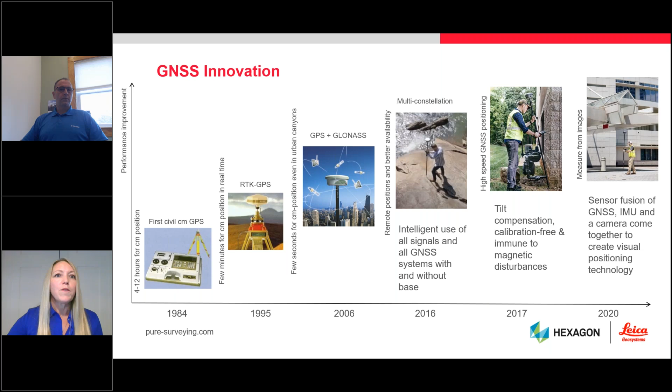But as with any technology, the speed of innovation doesn't necessarily equal the level of adoption. Surveyors who are comfortable with proven technologies don't always rush to implement the latest advances. And with the almost warp speed of technology innovation within the last several years, even surveyors who do make regular investments to stay on the leading edge don't always fully understand the power and potential of the systems they use. To further complicate the situation, manufacturers use their own terminology to define new capabilities. For professionals who want to optimize their GNSS systems to maximize the safety, efficiency, and results of their surveys, understanding the capabilities is not always straightforward.

In today's session, we're going to walk through some of the most meaningful developments in GNSS over the last several years, explain some of the terms, and help you become more knowledgeable about how you can fully leverage these functionalities to optimize your field work. For those in the audience who already use Leica Geosystems technology, please note this is not a training session. We do have training courses available that will give you a deep dive on the specific features, functions, and applications of your hardware and software. If that's something you're interested in, I encourage you to reach out to your local representative for more details. What we will do today is give you an overview of key capabilities so that you can be more informed as you use your current technology and as you look to make future investments.

So with that, we'll go ahead and get started. And I think the first term that we want to talk about here that you'll see often in relation to the Leica GNSS technology is Smart Check. So Bob, can you help us understand what SmartCheck is?

Yes, thank you, Christy. SmartCheck is built-in redundancy. Manufacturers many times have to create terms to help define technologies or processes inside of their hardware, and Smart Check is one of those. Now, this is not new to Leica, but it's just as relevant today as when it came out probably close to 15 years ago. What it allows us to do is when a receiver is in a high multipath environment and it has an initialization — and those that are used to using GPS are familiar with what that is — but it's when you have a fixed ambiguity of your sensor and your correction to get a position.

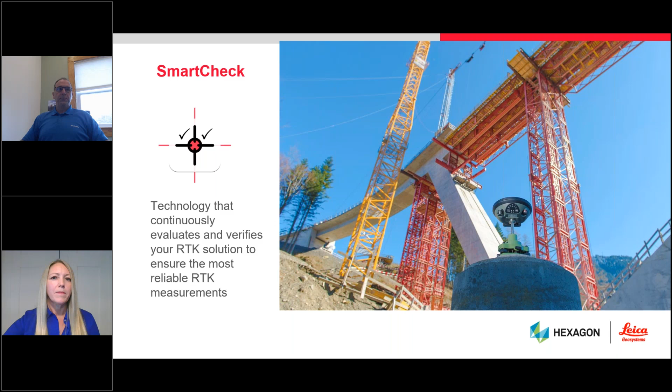So you can simply wait the 5 or 6 or 7 seconds to get a new check that shows your current initialization just got verified with a new one that was computed, and that you're good to go. So we're really talking about reliability. It's absolutely that reliability, the redundancy, and building confidence in the solution you're getting from your hardware.

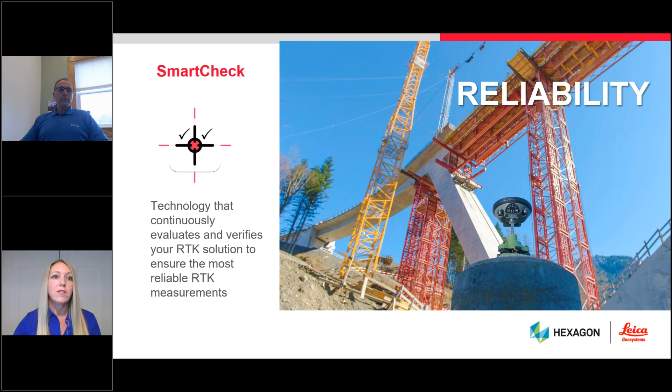Something else you'll often see when we're talking about Leica GNSS technology is SmartNet. Tell us what SmartNet is all about. SmartNet is our network correction for RTK service.

So we have base and rover that many people are familiar with. A lot of people are also familiar with networks, whether a state solution or other competitors that have networks as well, some built strictly to service the agriculture industry. SmartNet is the Hexagon Leica branded network for the world, but specifically we're talking about North America here.

We have 1,500 stations in 50 states, so not every state is completely covered, but we are present in every state and 8 provinces in Canada. This is not exclusive to Leica receivers, so it can be used by other brands, other makes and models of receivers. The big thing you want to know and check always is the quality of your network.

There are many other networks that are very well built and maintained, and then there are other ones that, while they may be good networks for their design purpose, like agriculture, they don't meet the demands and accuracies required by a surveyor. So that's something you always want to be aware of.

Having SmartNet is really about having productivity. It's about being able to go out, and as long as you have a connection to a network and you're inside the large area covered by SmartNet, you can just start your receiver and go to work. You can let us worry about modernization of the base stations these corrections are derived from. So it's just about being more productive, covering this large area without changing and worrying about getting new logins for other networks in different areas.

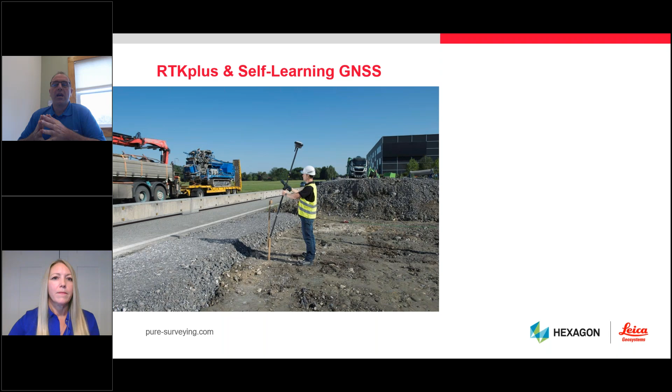With those previous advances we were talking about with SmartNet, with the ability to use SmartLink, with the number of satellites that have been launched and the number of signals on each satellite multiplying rapidly, having a receiver that can make decisions basically second by second on the best RTK or satellite geometry, or which satellites to use, is very important. Along with, say, you step over a hill and lose your cellular connection, being able to transition seamlessly into using the SmartLink service, or SmartLink fill service, to bridge the gap and go measure.

Maybe it's just a couple of iron pipes, maybe it's just a fence on the back of a property line. It would take a lot of time and effort to go measure another way. I'd either have to set up a different base station or back up to some place where I could set some control to set up a robotic total station to make these measurements.

Now I can bridge the gap. It's another technology enhancer that allows us to bridge gaps when RTK position or accuracy is acceptable for the measurements we're making. We don't have to pull a different tool out of our toolbox to go get those measurements. So we're really talking about efficiency here more than anything, and it's not manual. You don't have to go in and turn off specific satellites or make these decisions. It's really about the processor speed built into these sensors that allows them to do it for you.

Okay, well what about the other things we've been talking about so far? Is there anything the professional in the field needs to do to take advantage of these capabilities? Like we said, many of these, SmartNet, SmartLink, are subscription services. So those are things you'd need to talk to a local sales rep about acquiring, or maybe do some research online. Obviously a lot of this is on Google, but you can contact your sales rep. And then some of it is about your receiver and understanding the value that may be gained.

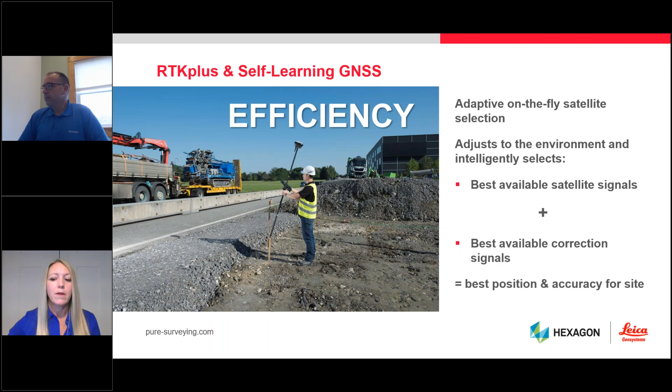All right, so all of those things are really significant advances on their own that we've seen over probably the last 5 years. Now we're also seeing an acceleration of GNSS technology, both in terms of what's happening in the global satellite constellation and how sensors are able to make use of this information and add a greater level of intelligence to the results. Can you talk us through what this means for surveyors in their day-to-day work? And I am going to go ahead and let you take over on the screen here in just a moment so we can more easily share the next few slides.

Absolutely, it's about expanding the boundaries and taking advantage of the signals and the corrections provided by the satellites. These are modernization efforts that have come about through the US with GPS and other countries, be it Russia with the GLONASS satellites or the European Union with the Galileo satellites, and the enhancements available through those services and technologies that have been launched and put into space as part of the space component.

And 2 support the new L1C, which, side note, don't confuse that with the original L1 C/A code, which was the original civilian signal off of the GPS signal. So this is going to make us more and more robust. It's the multi-frequency, it's the ability to work in more high multipath environments, specifically in canopy and stuff like that.

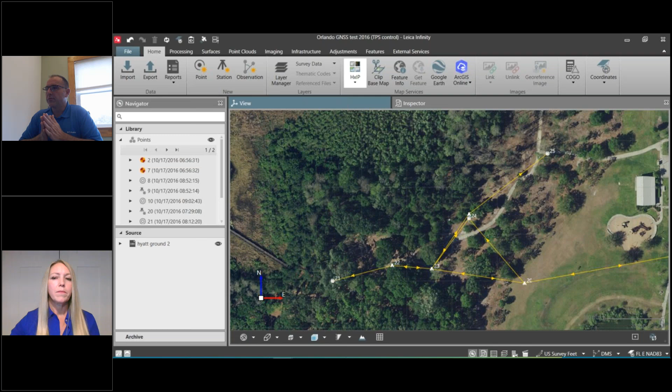The next slide will kind of run through a scenario that was done by Pierre Lebay. And this was just some testing that we actually have a little more metadata on to help quantify the value of the L5 component. So he went into this wooded environment.

This is a quick video just to give you some context of the size of the trees and the environment that he was measuring and working inside. And we were again comparing the GS14 to the GS16 just for our own knowledge and to gain some perception and value that we could help display to the customer.

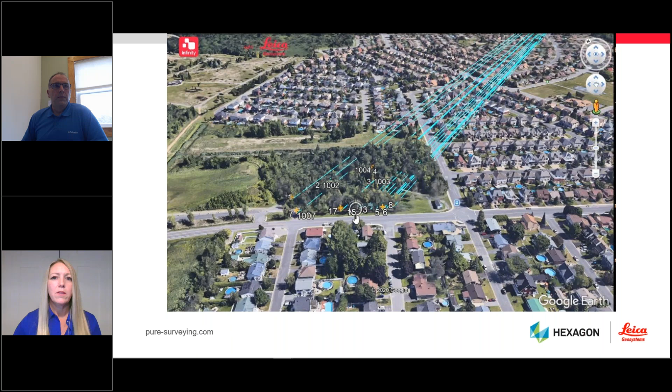Now, does this mean, Bob, that with the GS16 you can survey in the trees? It doesn't. It means you can push boundaries. So in this case, we were able to go further than we could ever go before, and we were able to work in these environments.

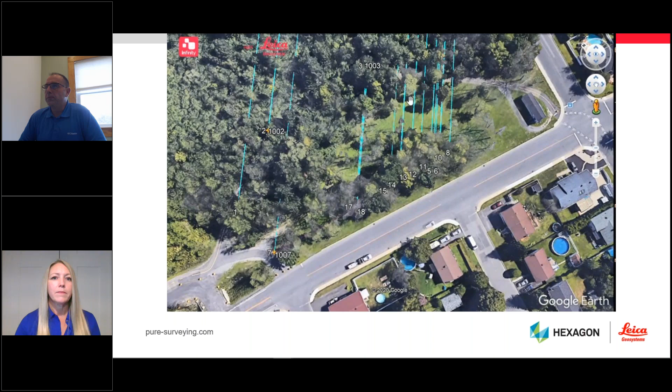Now, I don't know specifically what time of year it was - maybe there was a little more canopy off or on. There's nothing that says you'll always be able to work in every tree environment. Your length of baseline, whether you're using base and rover, your network - very important component to this is your network or the base that you're using. Does it support full GNSS?

Because many people do run mostly network rovers, for instance - they go out to an environment that doesn't have a network, so then they set up their own base, and they may be using a legacy receiver they have. Well, as soon as you use that legacy receiver that doesn't support all the signals that your rover does, the ones your rover is tracking become irrelevant. The two need to only use common sources. So if a satellite is not seen by one or the other, it can't be used. So if you take anything away from the base, you also have to end up taking that away from the rover.

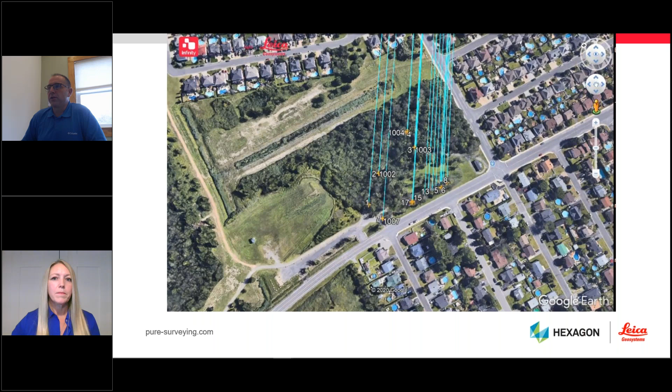So while we're pushing boundaries, one of the main tenets and rules that our developers live by is they try to make this line very, very narrow - which means that if you get initialization, your initialization is good, and you can either work or you can't work. The last thing we want to do is get bad initializations and bad measurements, right? So that's something manufacturers can play with - how loose and how restrictive they are when they allow those initializations, and we keep ours to a very, very tight line.

What we're showing on this slide is that same comparison. On the left were measurements taken with the GS14 and the initialization times. We had a max of 5 minutes to get initialized before we would move on to the next point.

You can see there, it took about 24 minutes to measure 6 of the 10 points. So only 60% of our target points were measured, and now we have to find another tool in our toolbox to go measure those.

It took us 24 minutes, as opposed to when we went to the same exact site, those same exact points with the GS16, we were able to get 90% of them in half the time. It took about 12 minutes to take 9 of the 10 measurements, and there's only 1 point that we couldn't get.

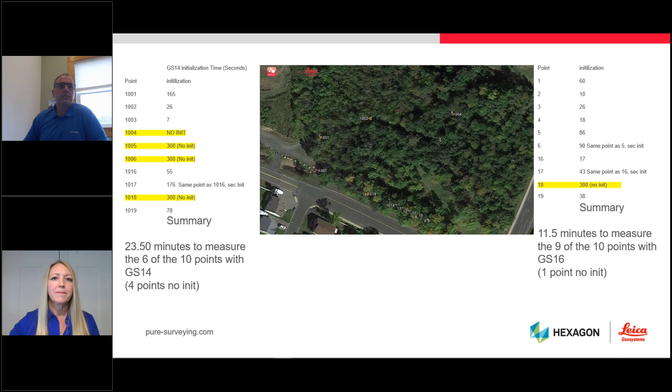So following on those same footsteps, a couple of years later, we launched the GS18T, which was a huge advancement for us and for everybody, because it gave us a way to measure tilt-compensated points without using a magnetic compass.

Magnetic compasses have been an issue, which is why William Austin Burt built the first solar compass for surveyors in 1835. So we recognize that magnetic disturbances in the environment were a problem, even to a regular magnetic compass, that long ago.

Well, take all the technological advancements we have — the buildings, the steel in buildings, the number of cars, underground electric, overground electric, different rates — all these things are disturbances to a magnetic compass.

So with the launch of the IMU-based correction for a tilt rover, we were able to have a calibration-free, magnetically immune tilt rover, and it was proven accurate and reliable — all things that surveyors absolutely need to trust in a tool and to put it into service in their fleets.

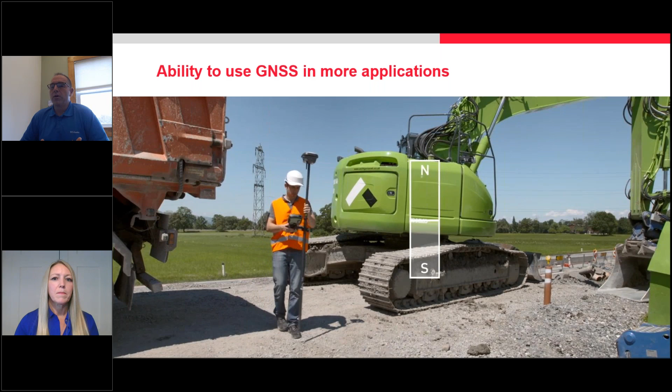This wasn't just about overcoming a limitation — it's about changing what we could measure and how we could measure it. Being able to check: did this truck just run over this hub? If anybody's been on a construction site, you're always wondering, did he back up and then move forward? Do I need to flag it? Do I need to dig it out and replace it? Did this backhoe just eliminate this hub? I just blue-topped all this and equipment moves in.

I can make those checks as I walk by, and as you can see, there are huge magnetic disturbances there with the gas motors and the firing and all that stuff.

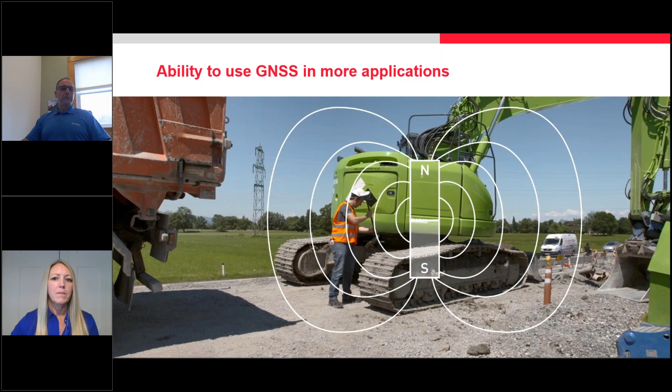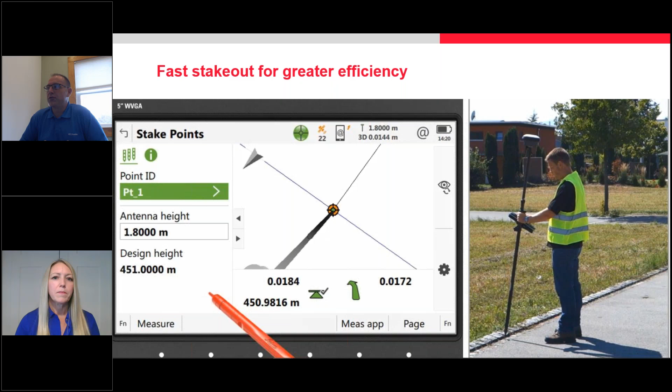So these are the types of things that we were able to overcome. One subtle challenge was forgetting about the bubble and the faster stakeout component. This was more of a challenge because of our legacy training, being so used to leveling that bubble before taking a measurement. Here, we already know our orientation and position. I don't have to stop, plumb the rod, move it, replumb, and adjust repeatedly. I can see it on my screen, my arrow goes green, I know I'm within my chosen tolerances, and I set the point.

It's probably 2 to 3 times faster staking a house or staking specific points using this tilt rover. So again, it was about efficiency to the end user, was the purpose of having this technology. It's not just a cool widget that made for good marketing. It was something that actually delivered value to the end user.

And if you have more work than you can get done, if your guys are working 70 or 80 hours a week, this is technology that can allow you to alleviate some of that stress on your workforce, allow you to take in more jobs and get them done faster, so you can increase your revenue and profitability.

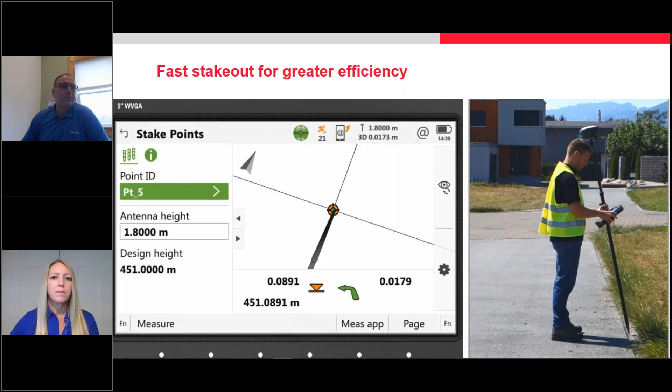Our latest release, and we'll get into some scenarios and working environments of this, is truly embracing visual positioning. So again, now that we have a tilt rover, what happens if I could capture in images points that I can't put this rover tip on, things I can't measure with GPS traditionally or up until this point, but GPS accuracy is acceptable technology.

So I don't need to do a closed traverse and measure these points using another tool for accuracy. I'm using it because the current sensor, the current technology I have, doesn't give me the ability to get the measurement I need.

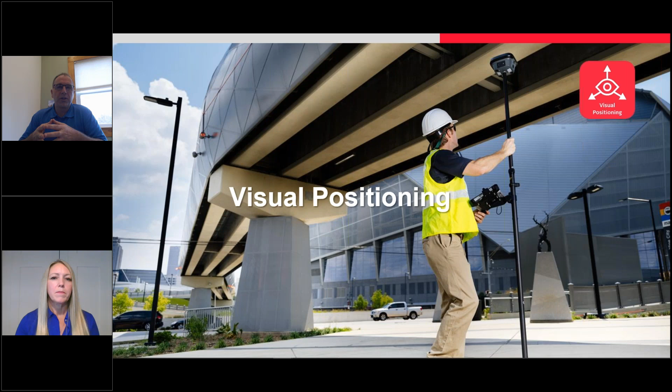And this is true sensor fusion. We've taken the GPS positioning we've already talked about, all the technologies that go into that. We include the IMU, so we can compensate for the pitch, heave, and roll of the receiver. Now we add a vision sensor or camera to that, and the processing power to fine tune the center of that, and be able to pick points and automate many times the picking of those points to calculate points inside the images. We'll go into that here in a second.

So again, we're looking at GNSS survey grade accuracy as acceptable. Here we're talking 2 to 4 centimeters two-dimensionally and 3 to 5 centimeters three-dimensionally. If we use the Smart Link correction service, we increase that by a couple centimeters on both sides.

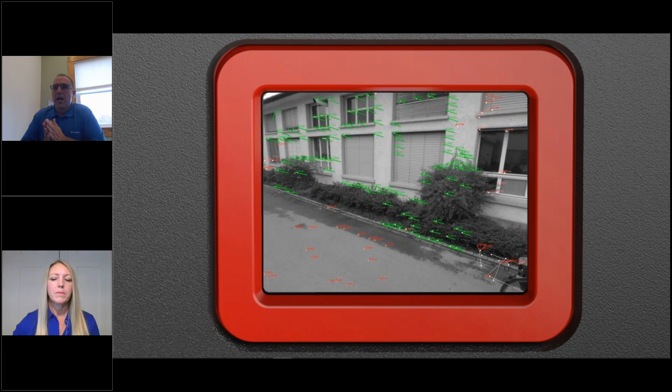What we're doing here, like I said, is true sensor fusion, and what does that look like to your receiver? This is a quick video of what that imaging sensor is doing. Anybody familiar with our RTC 360 knows we have the VIS technology, which helps position the sensor, positioning that laser scanner to within a couple of inches using an IMU and visual positioning.

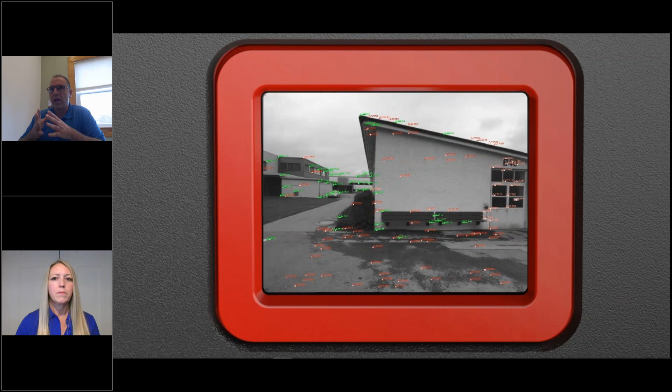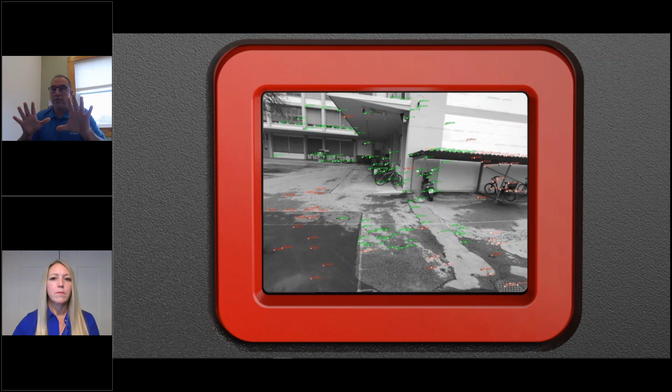What we're doing here is not positioning the sensor. We know very precisely where that center is because we have an RTK initialization and an initialized IMU on board. What we're doing here is finding objects, or finding specific pixels in the image. So when I select a specific object, it can automatically look through images in front of and behind, reconcile, and automatically pick that same object in those other images.

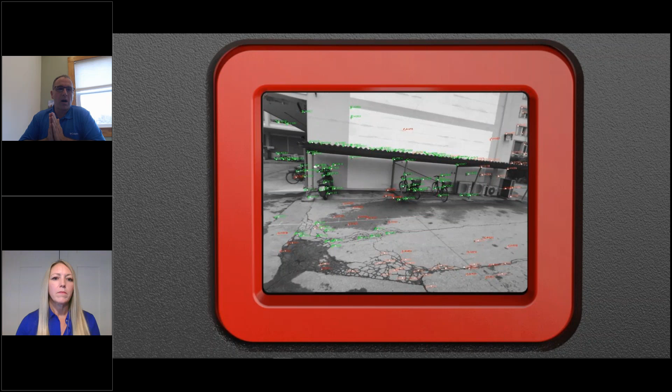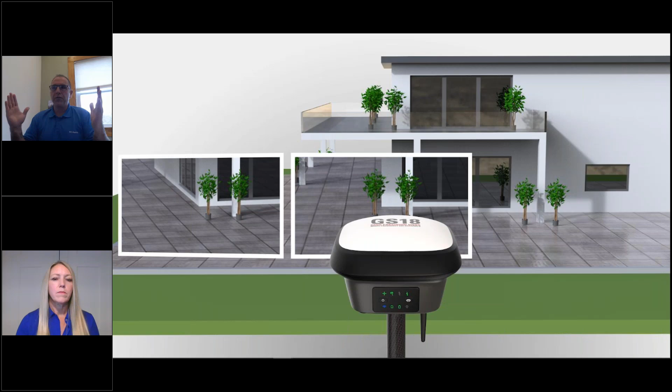I've got another example of what that will look like here. What we do, or our perception is, we have the GS18I, we have an object we want to capture, so we back up and walk around that object, in a line where that object is offset to the right or left. Then we go to the center of that image group and pick that same pixel, and the system will automatically look at the images in front of, behind, and pick that same pixel and compute the point at the intersection.

So this is very different than any technology that was out there previously using some type of visualization sensor, as those were static sensors put on control points and then had to be constrained, because we can solve for the full 6 degrees of freedom.

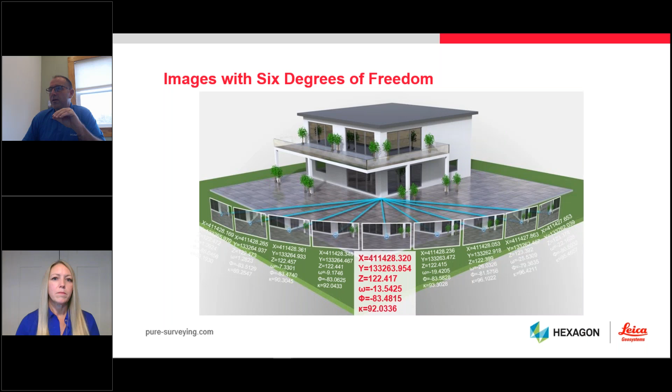So what that allows us to do is solve for the full 6 degrees of freedom in each image. We can position X, Y, and Z, but then we can also place the pitch, yaw, roll to each one of these sensors or images, so that we can compute the pixel and the intersection of all these and apply a code and the coordinate to that point. And this can all be done in the field.

There are a lot of components that can be done in office software, and we will definitely be touching on that in a future webinar. But what we're going to focus on here is what we can get out of Captivate and the GS18I in the field in these following scenarios.

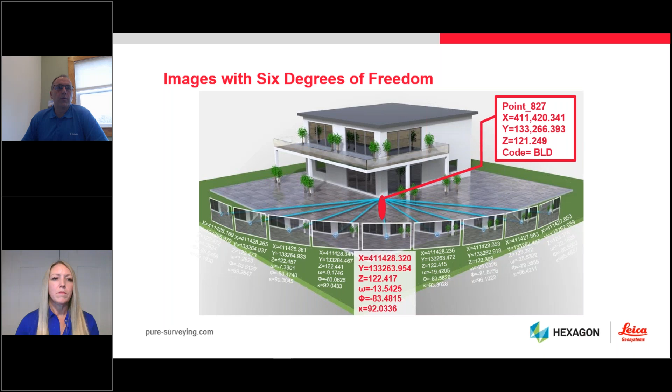We will show you a teaser at the end that kind of samples what we could get by incorporating the Infinity software as well. So what we're looking at here is there's a redesign of a roadway, whether they're just going to overlay it or they're going to completely enhance this area and maybe the intersection next to it.

This is something a lot of surveyors are very familiar with. We get a boundaries or a limits of our topo, and we can instantly go to the aerial photography here and identify 3 areas that are going to be challenging for GPS. 2 of those are challenging just because they're controlled environments, so they're gated off areas that we can't readily gain access to. And the other one is heavy canopy here that maybe we can't get the measurements from.

Maybe these are big oak trees, maybe they're historic trees, and they're going to design around them, you know, shift the road, do whatever they need to do to make sure they preserve these large oak trees.

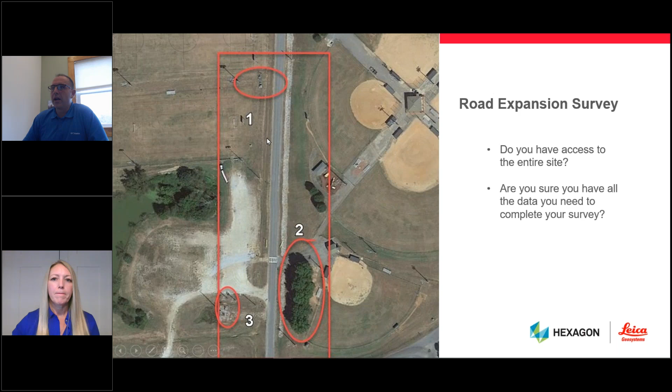So we'll cover each one of these challenging areas with the GS18I. I think the rest of it is pretty self-explanatory, how you would use RTK to measure the roadway, the crosswalks, and these other features here.

So the first one is inside this electrical. You can see we have a bunch of meter boxes inside of this fenced-in area. This is an area where we could go in, if we got access to it, with a GS18T and measure it.

If you had a robot, you could set up on the outside and maybe get reflectorless measurements through the fence. You'd have to do some fine tuning there to make sure you didn't pick up the fence, but you could probably gain that, but you're going to be less efficient.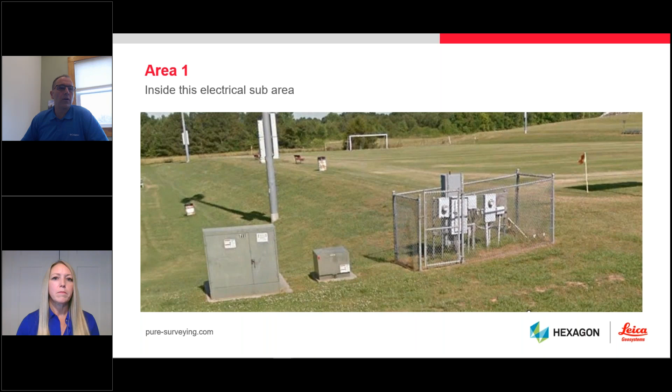You have to set control, you have to get different tools out, do station setup, backsight, you have to have something to check into. All these things take time in the field and slow you down. Maybe this is a long way away and that time will cause you to be there redundant days as opposed to being able to collect all this in a single site visit. All those things cost money to accomplish.

So what we've done here is we've captured an image group like we showed in the previous animation. We walked past the electrical area here outside the fence. And now we're going to go in and create points at these electrical chutes where they come out of the ground. So we simply go in, store it, calculate, give it a code, and take the measurement.

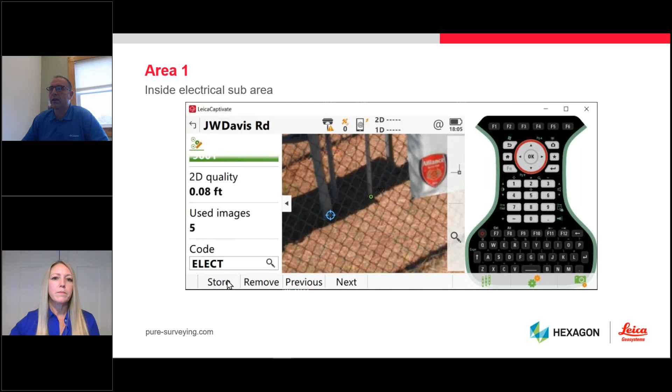Now that one happened to process everything automatically. Again, this one did too. It went to 5 images. We had 8 hundredths of a QC value. So we're happy with that.

On these next couple, we'll go in and we're going to pick as well. You can see that this is highly shadowed, so it's very dark, but we're able to see what we need out of the image and we can start taking the measurement.

In this case, the system wasn't able, probably because of the increased shadowing there, to automatically pick. So we need to go and manually add some more vectors from different images. That's all we do: at the bottom, we can scroll through our image group by going previous or next. We can get to those, zoom in on those images, and then we pick exactly where we want to create that point.

And then you can see that we have a 2D quality of our intersection computed on the screen for us. And we can do this to as many images as we have until we get through the QC value that we are happy with.

So there we had 4 points. Now we will pick one more of these, I believe. So I'm backing up to get to the center of my image group for the next electric feed that I want to grab.

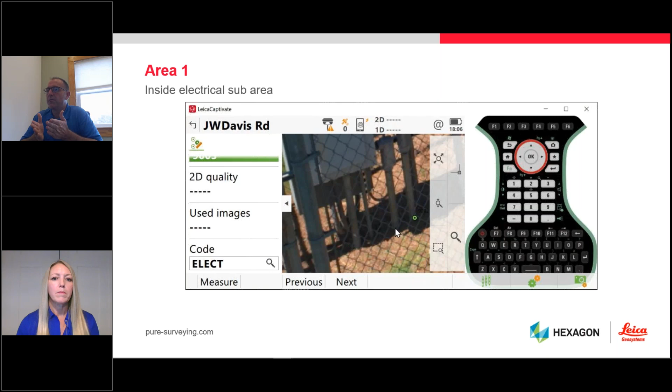So this will collect an image when you're walking or creating an image group at about one image every half a second. So there is a distance - you do want to be within 2 to 30 feet of the object you're trying to capture, and you want to digitize points inside of, like we are right here.

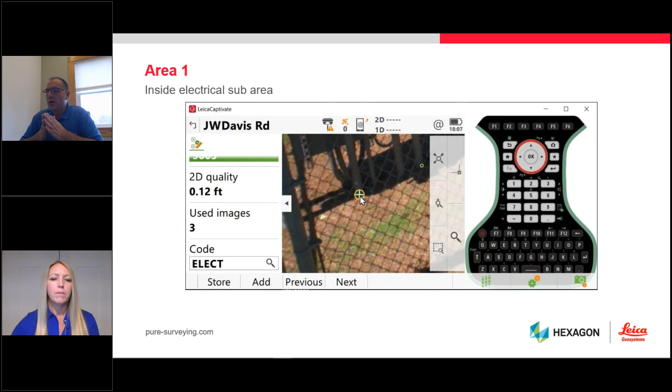So the great thing about this is it's still a GS18T with the imaging capability. So it's a GS18I, but it has all the capabilities of the GS18T, all the GNSS modernization along with the imaging sensor. So this is one tool that can do all your GNSS needs as a rover.

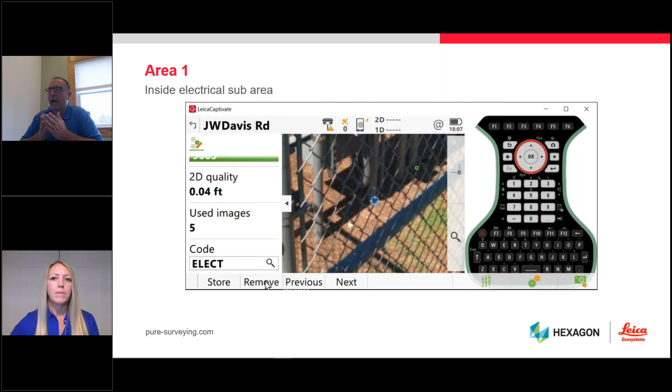So we'll go here, and you can see I'm moving down to get the image to where I can see the object that I want to create a point on. There I had to go quite far forward in the image group. Once I add that, we can create the point.

Guess we're going to do one more here. I don't remember exactly how many I picked, but again, that last one, you saw the lighting improved a lot, and it was able to automatically pick that point when it wasn't in the deep shadow.

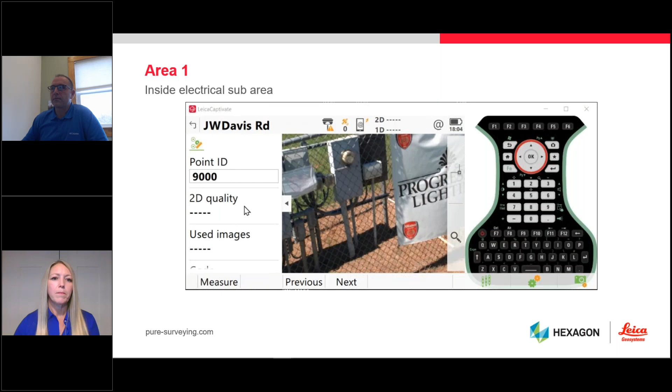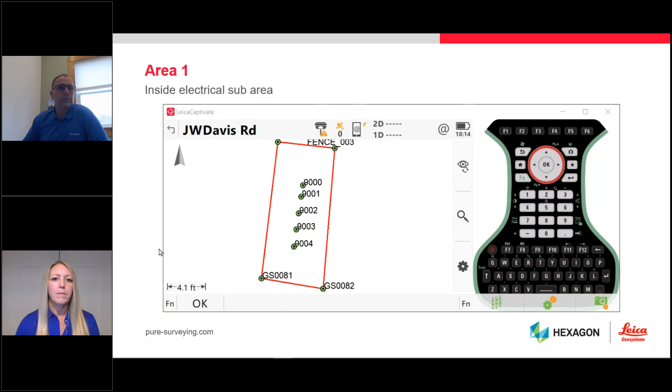In the next area here, you can see that we have those large oak trees that we described in the outline of this project. So we have 5 of them, and we will measure those using the imaging.

Again, this is an area where we have tools - you've been measuring this before, you've been using total stations, maybe in the right day at the right time. You can go in there with the GS18T and use the tilt functionality and the constellations in the right spot where you can kind of tilt it out and measure the base of that tree.

But at the time when it's not, when the multipath is too high, do you want to stand around for 5 minutes to see if you can get that initialization? Is it worth it? Or if you have the GS18I, we can go through and capture an image group, go into that image group and measure what we need.

So here we'll go in and we'll start picking these trees, looking for something that's as photo identifiable as I can on the trunk of a tree. We can use all of our coding and our attribute library to measure. I can see there that it still gives me a QC warning if I don't have the quality that I predetermined and set, so that's user definable.

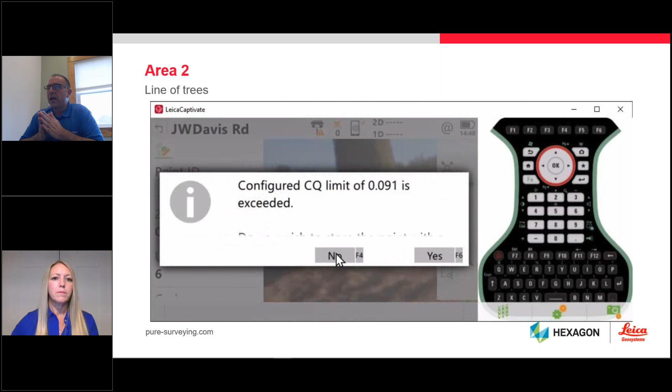And then we can go in and we can add more measurements from more angles, basically, to get a better intersection of those than what was automatically calculated. So we add those, we get to a level that we accept, and then we move on to the next one.

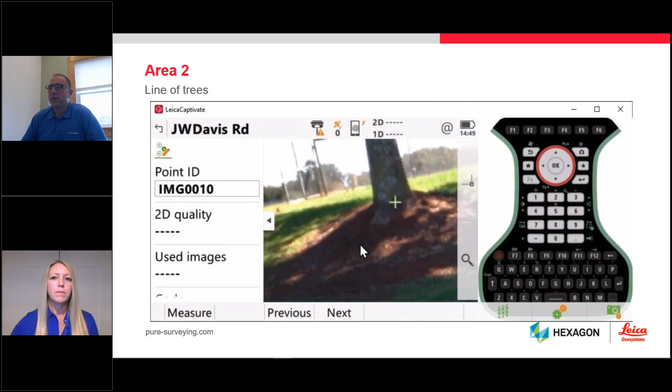So we end up picking on all these, and we can create them. And again, this is all done in field with the field software in Captivate. So you can compute inverses, you can do anything you want to validate these points. You can create offsets, you can do other things in real time in the field. And all these will be shown in your Office download.

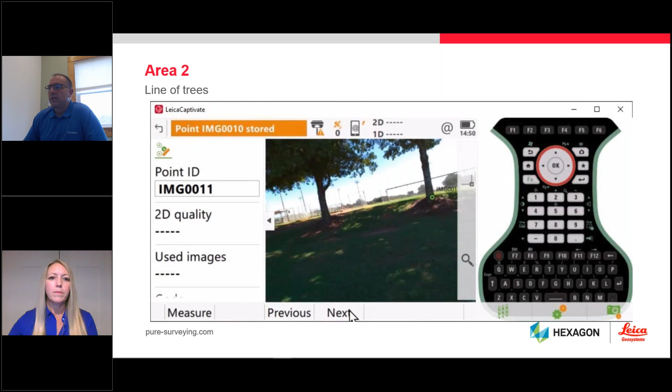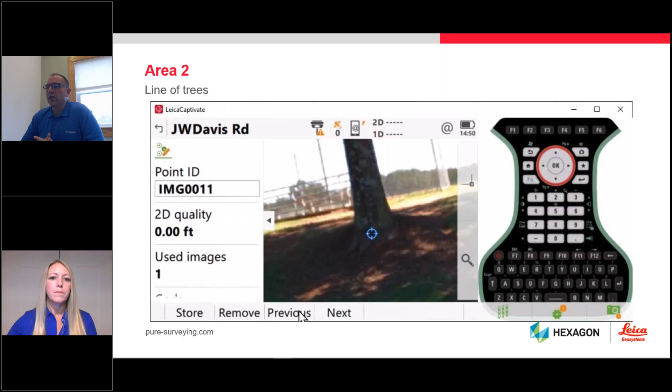So we have a couple more to go here. But you can see once you start developing and understand the workflow, it's very simple. It's very similar to any other measurements you take. Very nice that we can use all of our coding and all of our attribute libraries stay the same, so we don't have to worry about any of that changing. We are very familiar to you.

Bob, how long did it take to capture the images and data for this particular survey? We might need to ask Ted. I know he's on the line. No, so the images can be captured - the max is 1 minute.

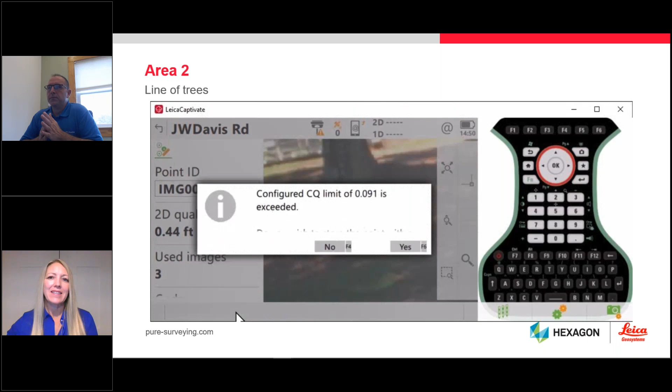These are probably 30 or 40-second walks, you just literally walk past it. It depends upon your speed of walk and your distance. You normally walk at a normal pace, and we get an image every half a second. So however long it takes you to walk from one end to the other is all it takes.

Each one of those fences took 15, 20 seconds at most, and I walked really slow. This tree line took about 35, 40 seconds, and again I walked slow just to make sure I had multiple images on there. So it was relatively fast in terms of just walking and collecting the images.

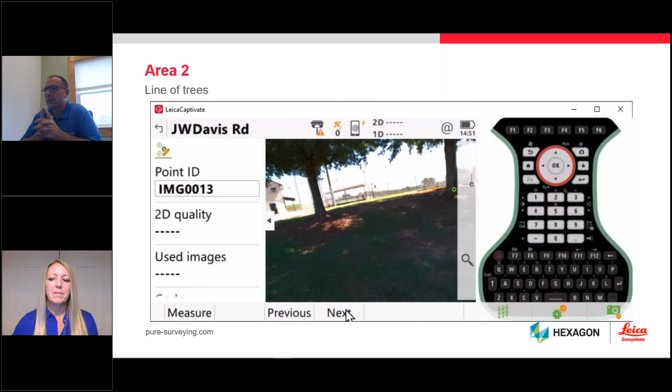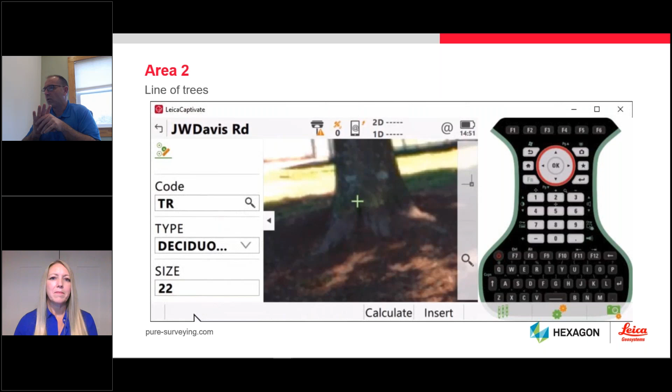You'll notice that when I hit next and previous, how little the perspective changes. That's because that next image has a lot of overlap and is very close to the one in front of it. That's why sometimes we go 2 or 3 images right or left instead of just using the next image, to get better geometry when we create this intersection of these different views.

So see there, I went like 4 images before I'm going to pick this next vector basically.

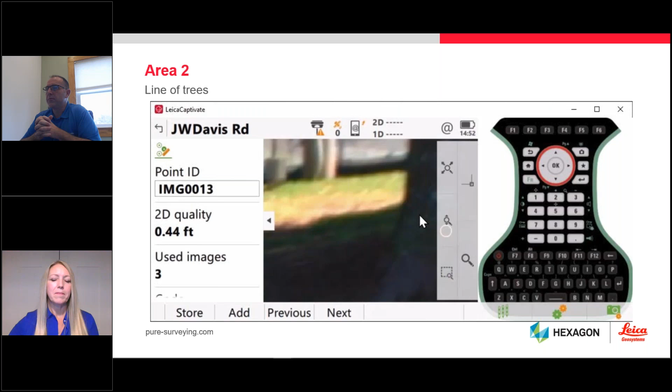Now I'm going to go the other way. Here we're at the very end of where I can see this object in that image group, but I can still drag it over.

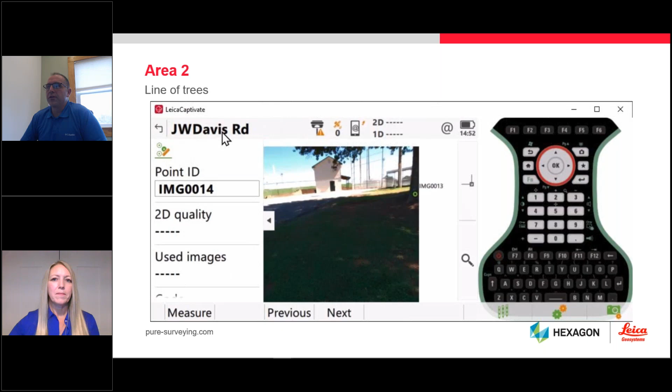And it met our QC value, so it just stored the point. So there we've measured all 5 of those trees in there. We can go into our 3D viewer and see how they look in relation to the rest of our topo.

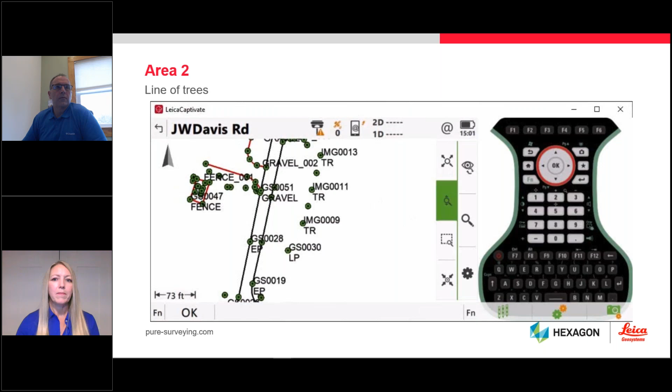Next, we're going to pick a couple of points inside of this pump station. Each one of these is just a sample. We're pulling out certain information, but you could go to each one of these image groups and keep picking more and more points. We just wanted to give you an example of what they look like when we create those.

So again, we're looking at it inside of Leica Captivate. This is our field software, and we will go through and create a couple of points inside of this image group.

So we go pick on the specific object, ask it to measure. Again, it gives us our 2D quality, and we can choose to either store and accept that, or add more vectors as need be.

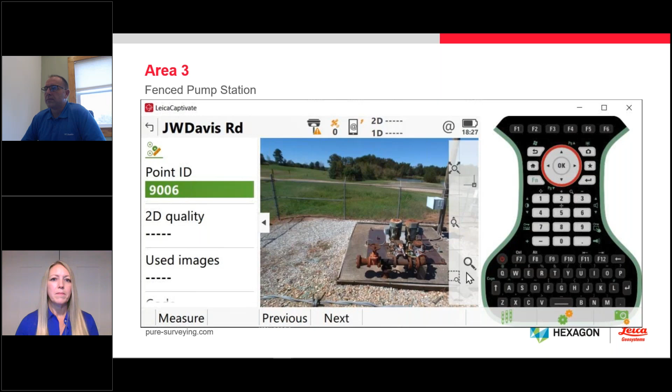We'll go to the other edge of concrete here. Now we'll take a measurement on the pump and on the 90 turn there.

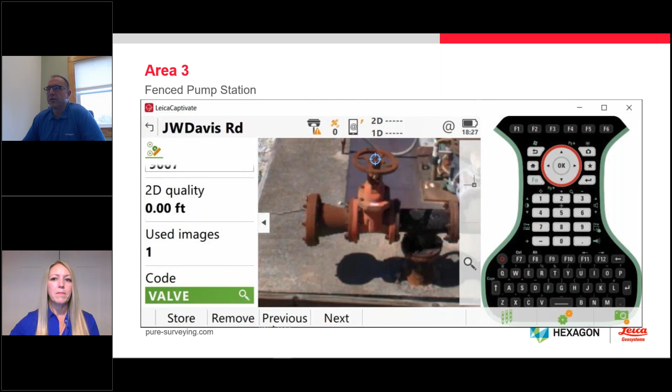So again, you see how easy it is to go in and select. We tell it to measure. This one did not auto calculate, so we'll go and select it in some more images manually.

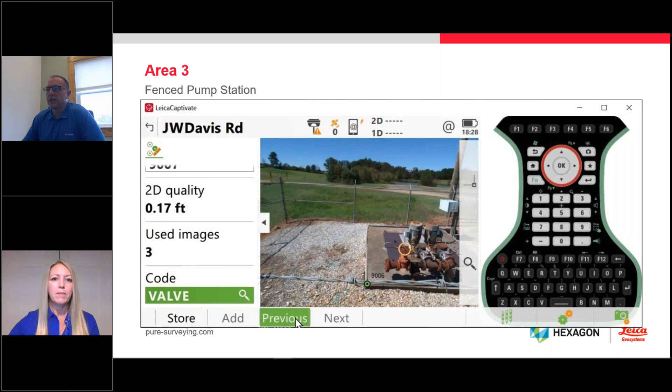The nice thing is it's constantly giving us a QC value. So if there's something that doesn't meet your accuracy needs or precision, you can choose not to take that measurement, and then you have to get another tool. But we're giving you all that knowledge in the field so you can make the choices that are right for you and your business.

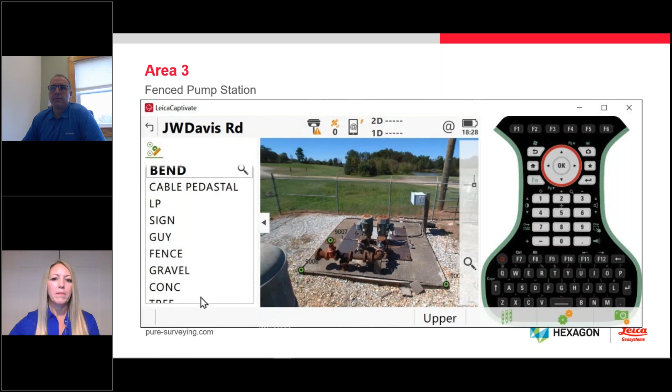So here we're going to shoot the bend, zoom in. And we've got our measurements.

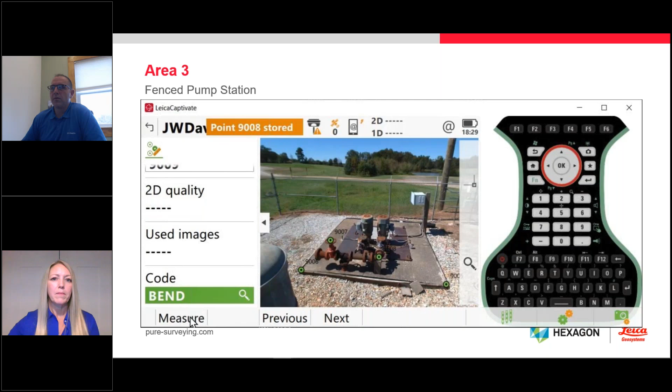So now in this next example, that's everything there. We did the 3 areas: the fenced in area that would be hard to gain access to, covering the electrical, the gas substation, and the trees, all using the GS18I in those difficult areas.

So now we'll look at an example of maybe a parking lot ALTA, where we can go check: did you miss anything? Did I start or stop the measurement at the storm? In this instance, we're going to zoom in here, and we don't pick up this inlet.

So somebody, it's 5 o'clock on Friday, they're trying to get out of there, nothing malicious, but they just didn't start or stop their curves. The tangent lines, you wouldn't know that necessarily without seeing it in another way.

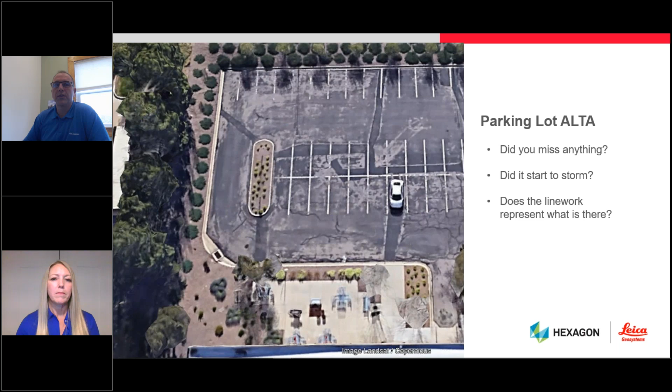So with that, we'll jump in, and I can go into my 3D viewer. We can zoom in to a couple areas, just doing some quality control here. And we can see we don't have that inlet inside of there. We see we have those tangent lines.

That's not a curve through the back of curb and the face of curb and flow line like it should be. We can come over here. We're looking to see if we got that manhole behind the curb. Maybe I went to Google Earth or something else to QC this, and it kind of alerted me that I wanted to go double check that, and it's not here.

So now if we have the image group captured, we can simply go into our GS imaging application, our measure inside of images, and we can select our image group. It opens up, and now we can go through those images to select that specific feature that was missed. So the first thing we're actually going to do here is just measure this edge of pavement as a check.

We're going to compute a quick inverse. Again, I don't know exactly where he set down the tip of the pole, so I'm going to pick what I see on the screen as the PI for this edge of asphalt or the flow line, whatever you want to code it. We're going to call it a check of edge of pavement. We'll take the measurement here and we'll store that.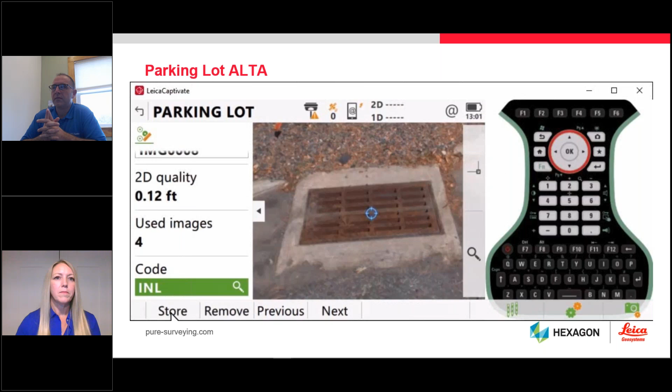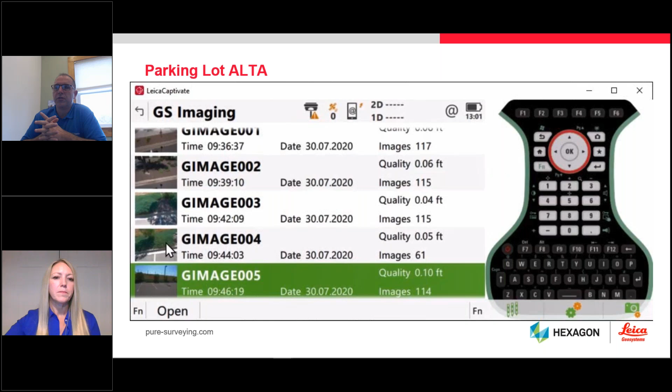So now we need to go to the other side of the parking lot that's in a different image group. So we go select that image group. I can see that's the back of curb, so I'm guessing there. Oh, look, there's my manhole. I can see my curb. So now I can go pick on the center. I'm going to change this to a manhole.

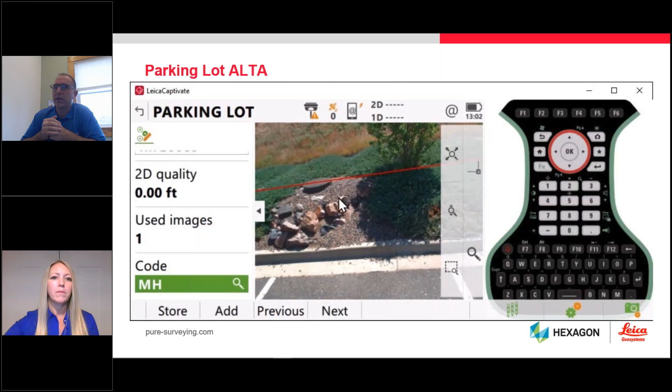We'll zoom in and fine tune that center pick, and we'll take a measurement. Okay, again, this didn't automatically go through and pick that, probably because of the angle and the lighting. It's all one color. So we'll go manually add a couple more vectors to this until we get the residuals that satisfy what we're doing here.

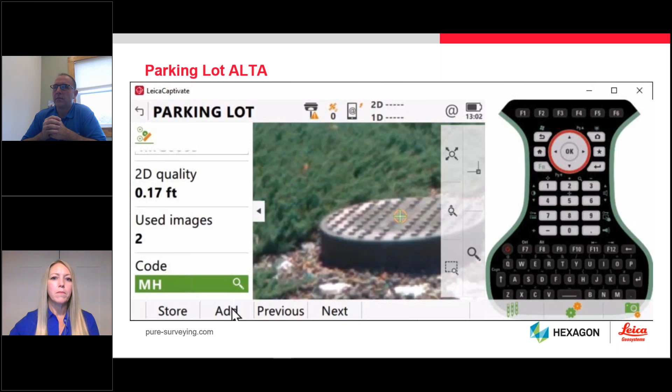So there we got down to eight hundredths for our quality control of the intersection. So we're going to accept that.

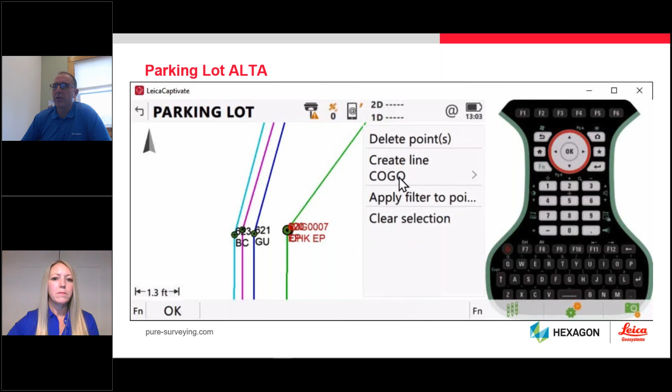Now we'll go back into our 3D viewer and we can visualize this, and we'll do a check, because we'll check that edge of asphalt that I picked, or edge of pavement, versus the one that was shot with the RTK measurement. So image 007 was my measurement in the images, and the 620 there was the one measured with RTK. We can go into COGO and compute an inverse.

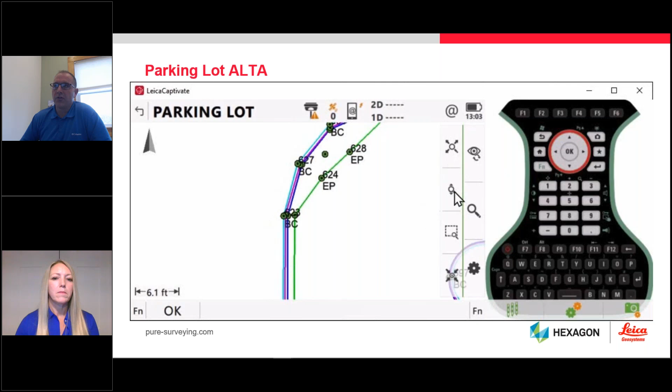And there I was able to get within four hundredths horizontally and six hundredths vertically of the same exact point. And again, I wasn't out there taking the measurement, so I don't know if it was actually on top of the concrete, if it was in the gap, or if he measured at the edge of the asphalt at the height. So I'm more than satisfied with that pick.

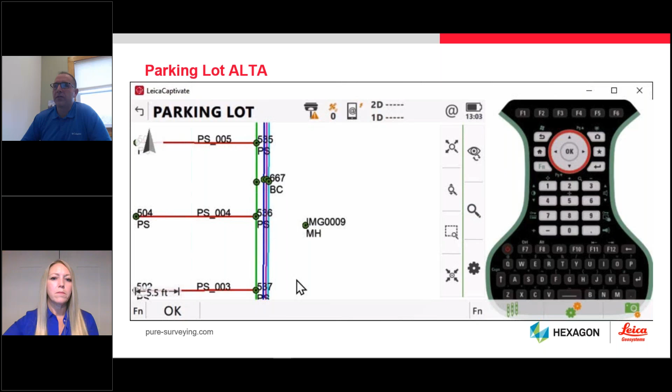Here we go in and zoom, and now I can see my manhole has been created behind my curb. All looks pretty good.

So that is basically using the imaging inside of Captivate and some of the different scenarios that you can cover and overcome using this technology. And this is only the in-field portion. Now we'll play a quick video of some of the power and some of the things you could do inside of the office in Infinity.

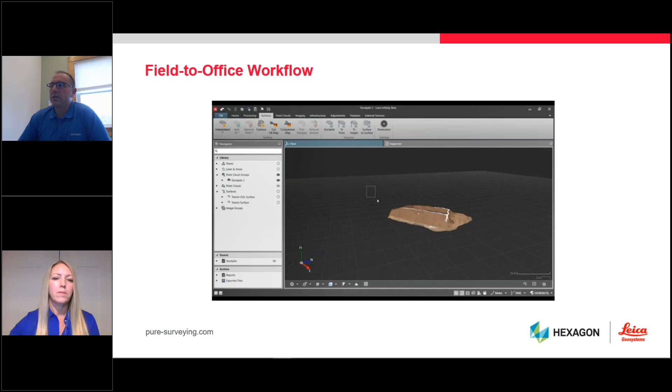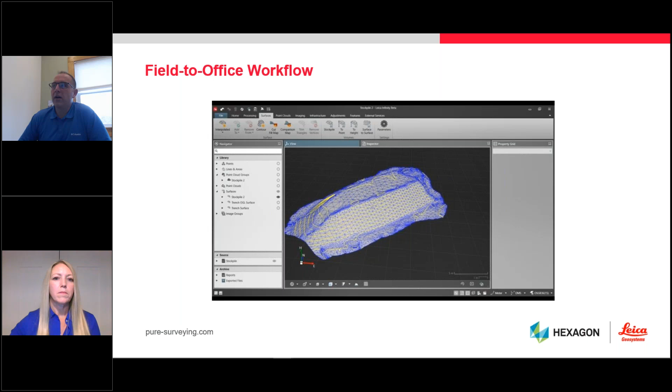So you can see this stockpile here. You can see the level of definition that we were able to zoom in and view this with. And now we're actually going to go in and rapidly just create a TIN over top of that. There, I have a TIN. I can now contour that stockpile. I can turn my TIN off and just have a solid, and I can create a report on that all with just a few simple clicks inside of the Infinity software.

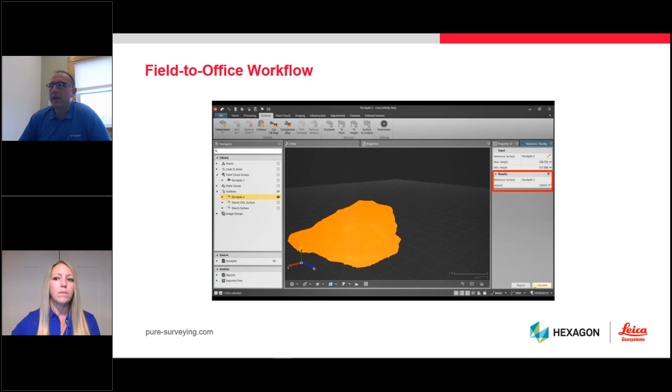So I did cut out a lot of other clipping and isolating to get down to that point cloud. But once you have that inside of Infinity, to create a volume report is just that simple.

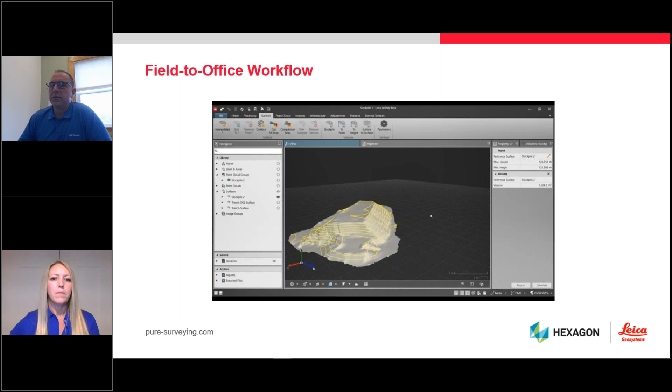The next example we'll go through is a site you're familiar with. You just saw it on the previous display, measuring the inlet and that manhole right there. This is a point cloud, a dense point cloud generated from the images inside of Infinity.

We can see here our flag line, flow line, face of curb, and back of curb are the four colors: green, blue, magenta, and aqua. We can see what this point cloud looks like, and the points that were measured for the striping as we pan down the face of curb to realize what can be done.

A lot of people have asked why this is different than flying it. Really, it's utilizing a lot of the same technology. The advantage is you can't fly a drone, or at least to my knowledge, and get good position at 6 or 8 feet to get this type of point cloud.

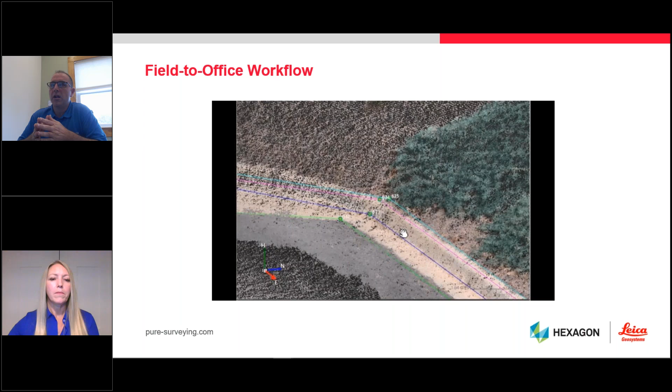When you have these face of curbs, when you have these oblique images in this area, this is a great area where you could augment both data sets together and really clean that up and enhance the definition of features like that curb.

You can also see here where those radiuses don't match up, and we have no curb behind the inlet because it's draining the planter area as well. It's servicing a larger area. And that's all we have with that one.

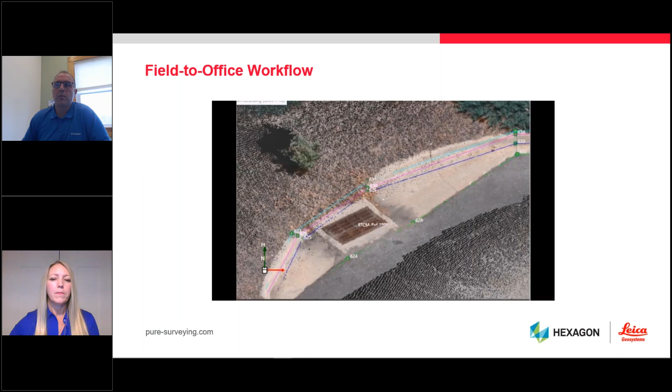I think we'll move into questions and answers.

So Bob, real quick, you were just showing us Infinity. Does someone have to have the Infinity software in order to make use of the GS18 I data, or is there another way that they can make use of it in their workflow?

No, absolutely not. That was what we were showing in those previous examples, what we could do with the I and the imaging inside of Captivate. So there's a stopping point where you can deliver up to that, and that's fine.

Or you can continue to grow and pick points similarly, but maybe it's a little bit faster to do it inside of Infinity, because it's more relaxing being in the office, with a bigger, nicer monitor and a nicer chair than the front seat of your truck.

So maybe you want the points and images, or you can have the point clouds from images, which we were showing at that very last one with the stockpile or the back of curb.

So all of those are points where you can choose what level or what service you need, or what fits your workflow, or what deliverable your customers are asking for. Because that's what it's really about - the deliverable you are delivering to your customer.

So if they are not interested in the point cloud and it doesn't have value to them, then maybe it's just about you doing the job faster or better, not having to wait on other people to gain access to those enclosed environments so you can get the measurements to satisfy the need.